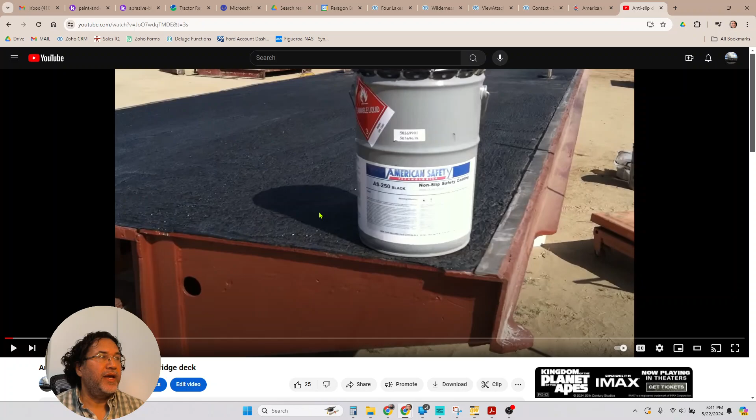Let me pull up a website for you real quick so you can see what that is. All right, so this is the AS250. We get it typically from Sherwin-Williams. It's a great product. If you go to our YouTube channel and just search for AS250 or anti-slip deck coating, you can see what that is. This is a video that I made several years ago,

but that's kind of what it looks like. It's a pretty aggressive surface. You pour it on and you squeegee it out, you roll it out. It's pretty aggressive stuff. So that's the actual decking. Let me go back to the proposal.

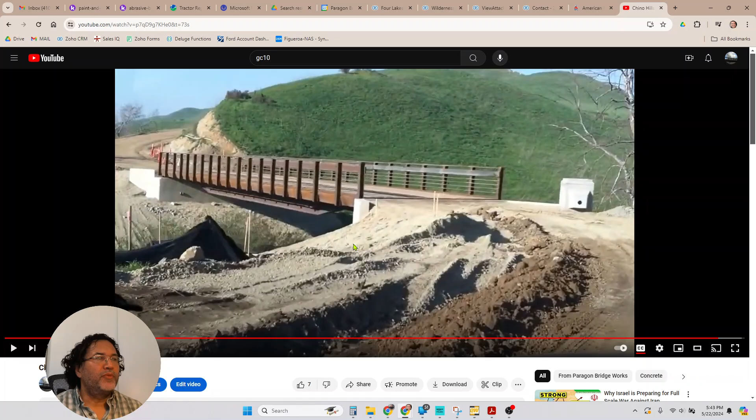All right, so that's the anti-slip. GC10 guardrails, let me pull that up real quick. All right, this is a bridge we did here in California for the state of California using our standard GC10 guardrails. They're by far our most common guardrails. You can see it has substantial posts all the way down. They're either a 6x6 square tube or a W6 wide flange I-beam. These are typically 2x6 rectangular tubes on the side and on the top, and then little 1x1s all the way across the bottom there.

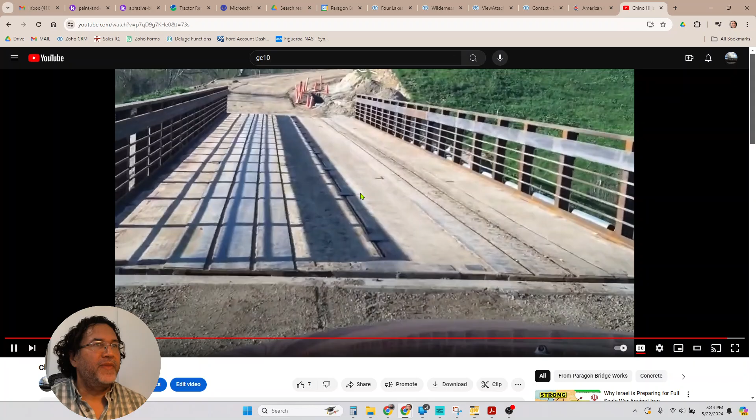Now, do you need guardrails? I don't think you do. Maybe you do. City or county may require it. Now our drawings have to show it, because we obviously don't want the liability of this bridge being built and not having guardrails, and then somebody falling off and getting hurt. So we're putting that on you. So we're going to design the bridge with the guardrails. Our engineering plans always include guardrails.

But if you don't want us to build them, that's entirely up to you. I know they're not cheap, so you could save some money by not building them now. But it is a liability later. So it's $36,000 to build those. We do strongly suggest that you do build those. But it's a private bridge. You can do whatever you want. I get that. I'm not going to force you to put guardrails on right now.

So that's what that's for, the GC10 guardrails. And we price them out per 10 linear foot sections. So depending on the bridge length, this will go up and down as well. Okay.

Then we have the paint the bridge deck. So this is actually not painting the deck itself. The deck is up here, the anti-slip coating. So that's the deck. I guess this is more like the sides of the bridge and not the top of the bridge. Let me get another video.

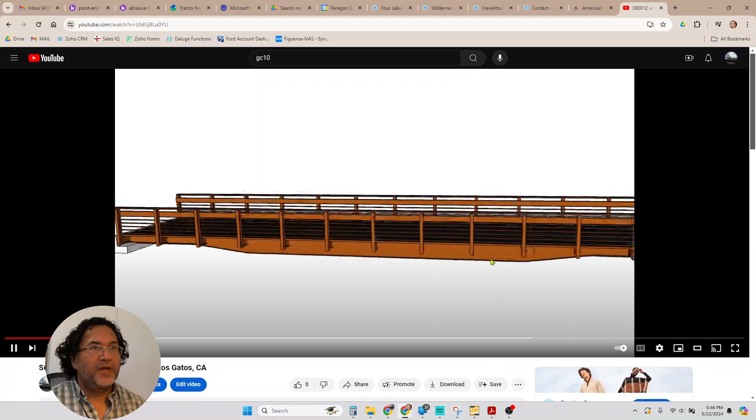Actually, I'm just browsing through my YouTube channel. There's actually quite a few videos that you guys might find helpful. Like I already have that S60 by 12 with GC10 guardrails already modeled out. Let me pause it. Skip this commercial. All right, so I've already had this bridge modeled, so you can see what it's going to look like. Now, if you look here, this is how we're going to make our bridge wider.

We just add these arms all the way down. So it's going to come in at 9 foot. We just add a bunch of arms all the way across. So whether you're going 40,000 pound capacity or 72,000 pound capacity, we still have to put these arms on here. We're just putting lighter gauge steel on there. So the amount of labor really stays the same, whether you're doing 40 or 72,000 pounds.

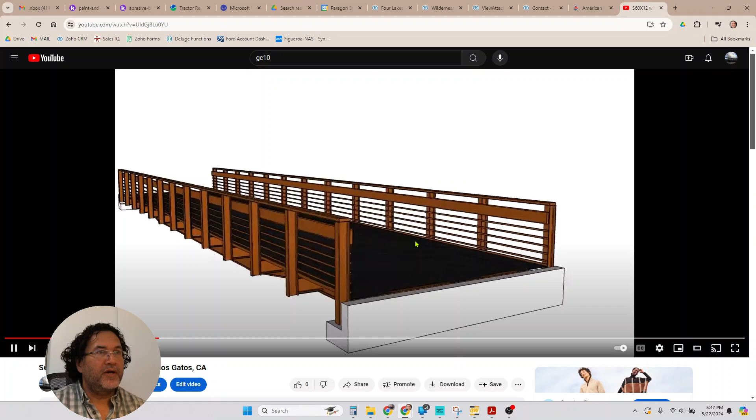But you can also do the GC10 guardrails. This one is utilizing W6 beams, same 2x6 side rail and top rail, same 1x1. These little, we call them the infill. That's just to keep little kids from falling through.

Okay. Now I'm going to go back and show you a couple of the videos that you might find helpful. This paint quality and quantity. So if you wanted to go to our videos and take a look at that one, that's GC10. GC10 is going to be very similar as well, but we do have videos that talk about the paint quantity and quality. You can search for that video so you can see what we're providing as far as paint.

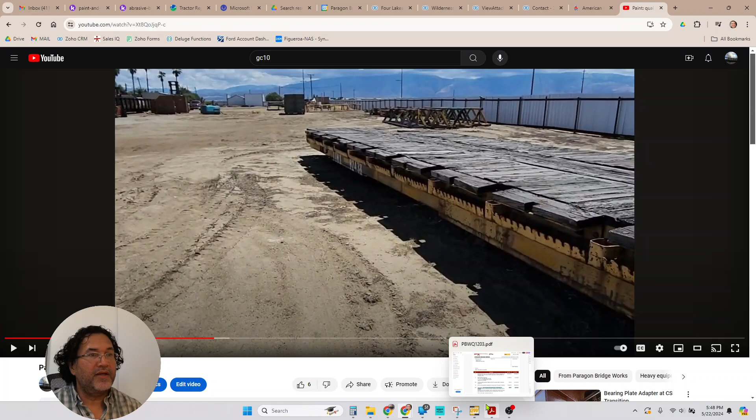We're not going to paint the entire bridge. We're not painting all the way up underneath the bridge. We're just painting the exposed sides of the bridge. If you want more painted, then you just increase the quantity, 200 square feet. So that's just based on square footage, how much paint you want. Now, just keep in mind, whenever the rail car bridge arrives, it will come already completely painted.

But my face looks kind of dark.

It will come completely painted with an existing paint job. We don't pick the color. It's usually a yellow or a black or a brown. But that's up underneath the bridge that you really don't see anyhow. So we'll have protective coating already on there. Generally, they're in pretty good condition. So whenever we're talking about these painting fees, it's painting the exposed sides of the bridge that we're adding the guardrails to, if you want us to do the guardrails.

Okay. Now, for the same price, for this bridge, we can design it with a curb, an 8-inch tall curb. That way, you do have some layer of protection. That wouldn't be that big of a deal. The warranty: this is our engineering fee, how much we're going to charge to design the bridge and warranty the bridge. So we're going to guarantee the bridge for 1 year. If you wanted a 3-year, 5-year, 10-year, we can also do that. The price just goes up a little bit.

Delivery of the bridge, $10,000. That's just freight. Modifying the existing abutments. So your abutments, we're probably going to have to put a cap on it. Some kind of a steel cap we're going to have to embed down in order to protect it. We don't want to mess with it too much, so that's a little bit more steel and labor to put a cap on your existing abutments. We may have to trim them down as well.

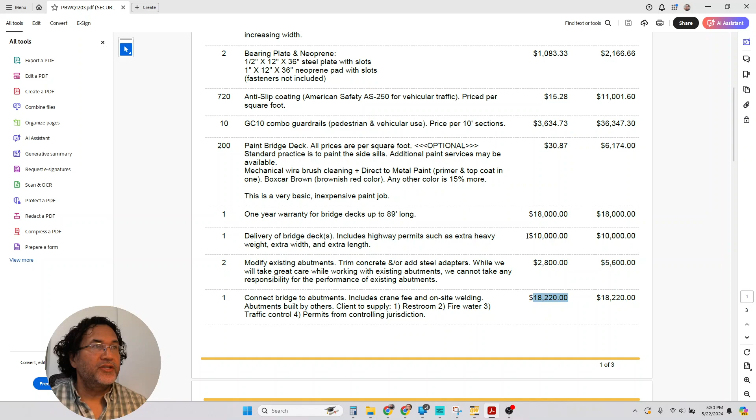This is the labor to set the bridge in place. Okay, and that's all for the bridge. So that's the whole bridge package there. You can modify, you can add, you can delete, whatever you want to. We're okay with it. If you don't want to paint the bridge, fine. Don't paint the bridge. Paint it next year. Paint it in a couple of years. Not a big deal.

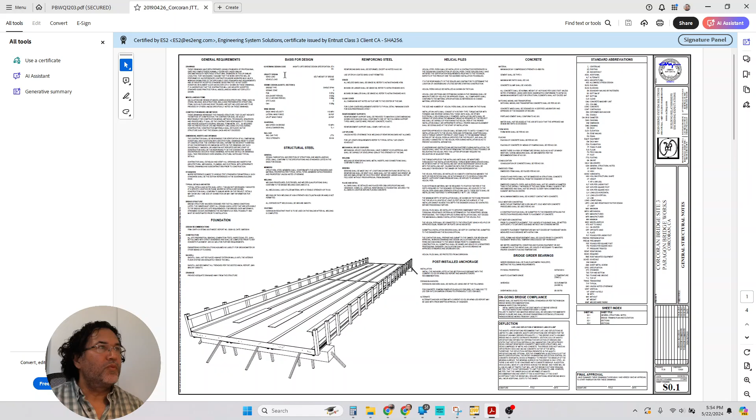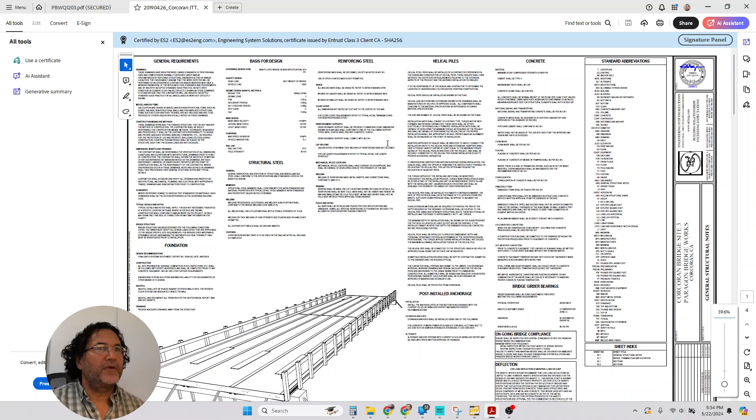It tells us what we're designing to, which in this particular case, we're designing to HS20. You can see that right there. This is a project for over here in California, but you can see this is what our plans look like. There's no topography or civil drawings with our standard engineering plans. These are just structural plans, and that's it.

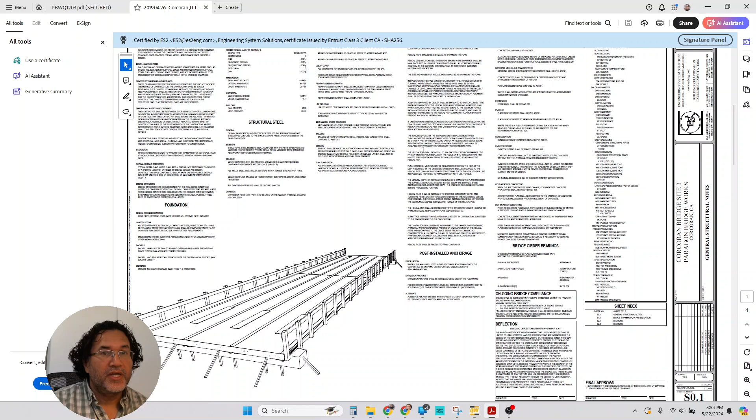So it includes the bridges, it includes all the abutment work. These use helicals, so it includes a bunch of details. This is three rail car side by side by side, rebar fitment. So this is what our plans generally look like: a cover sheet with some details, what we're designing to, and then just how to build this bridge. Okay.

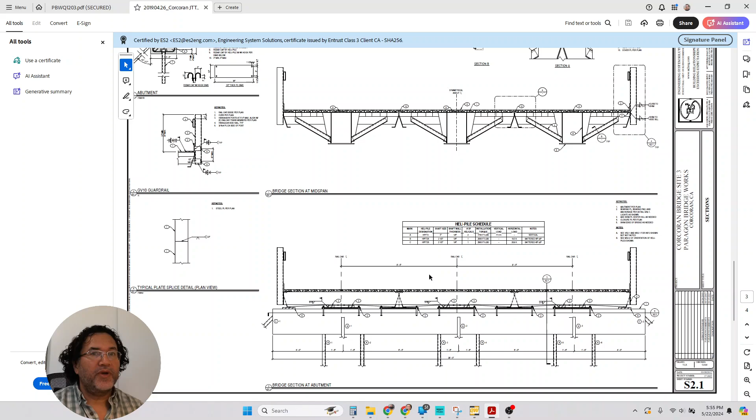I'm assuming your jurisdiction's probably going to want some kind of topography. They may not, but I'm assuming they will. To manage a job, we'll take our structural plans, walk them over to the county or the city, and they may want a civil. They may want some more information. So once we submit that, we'll have to start adding more fees depending on what other services we need to go out and hire. So the project management fee is $11,500. That's for us to go to the city or the county and submit our plans, and then they're going to tell us what else we need.

The permit application, the actual fees. I'm sorry, if you want us to pull the permit itself, that's $9,800. So the project management is $11,500. To actually pull the permit is $9,800. The expected permit fee is $5,000. It could be $2,000. It could be $500. I have no idea what that is, but $5,000 is a pretty reasonable number for this kind of a job. But that's completely out of our hands. We'll charge you whatever they charge us.

Survey: if they want us to survey our site, we don't need a survey because it's already an existing bridge. But if they want us to create a survey and include it with our plans, then we have to go out and hire a local surveyor. That's budgeted at $4,000. Could be $1,000, could be $6,000, but $4,000 is a pretty safe number. Generally, $2,500 to $4,500 is what we see them come in at.

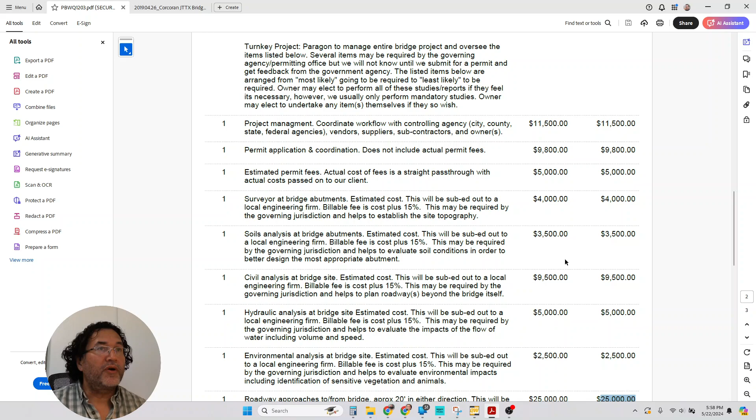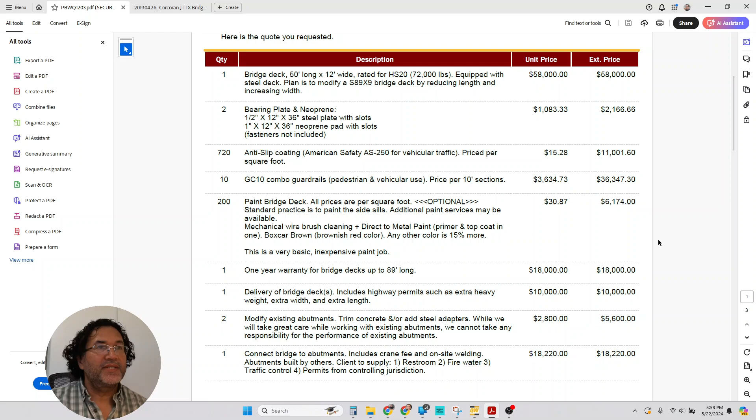Okay. So I'll keep this video short. If you have any questions, and a lot of these other things over here, if you want to try to reduce costs, there are some ways that we can explore to reduce costs as well. But this is kind of the nuts and bolts of the actual bridge itself. But we're pretty flexible. We'd love to work with you guys.